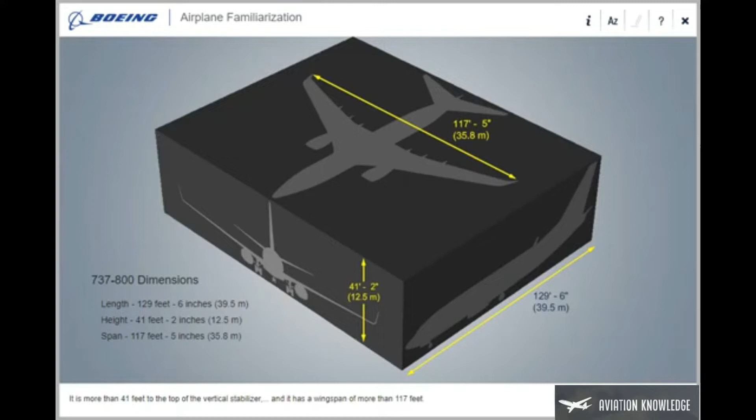The Boeing 737-800 airplane is approximately 130 feet from nose to tail. It is more than 41 feet to the top of the vertical stabilizer, and it has a wingspan of more than 117 feet. The minimum width to turn the airplane is approximately 79 feet, or 24 meters.

The weight limits for the 737 are different for each airline. There are limits for the maximum zero fuel weight, the maximum taxi weight, the maximum takeoff weight, and the maximum landing weight.

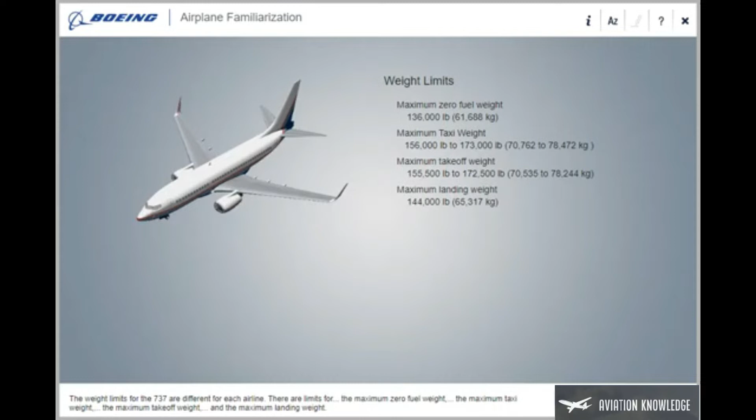The 737 has CFM56-7 gas turbine engines. The engines have a high bypass ratio and full authority digital electronic engine control, or EEC, for best operation. The engines can be set to supply between 24,200 and 27,300 pounds of thrust.

Each engine has a 90 kVA generator. The generators power different buses and are not used in parallel operation. The engine fan diameter is 61 inches. The engine nacelle has a flat bottom to give sufficient ground clearance.

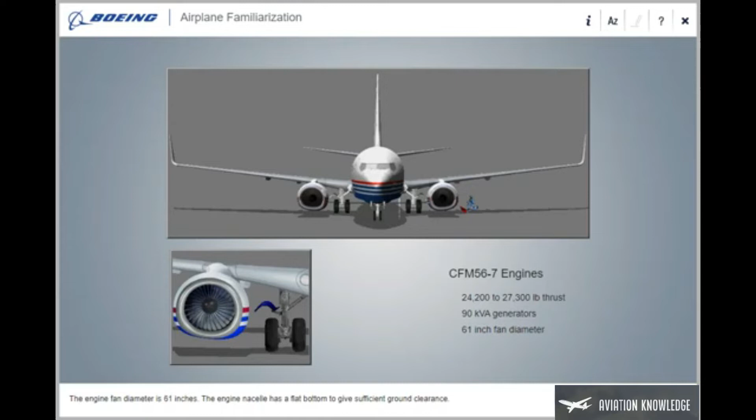The 737 can fly short to medium-range flights. The maximum altitude is 41,000 feet. The maximum operating speed is 0.82 Mach.

The 737 flight controls, normally operated by the hydraulic systems, control pitch, roll, and yaw.

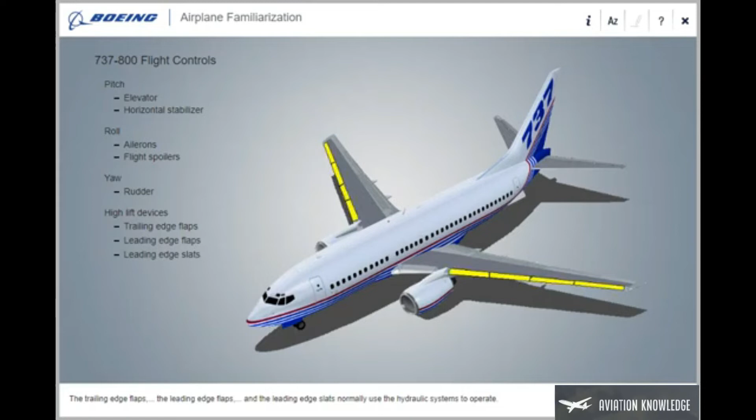The trailing edge flaps, leading edge flaps, and the leading edge slats normally use the hydraulic systems to operate.

Manual operation, called manual reversion, is available for pitch control and roll control.

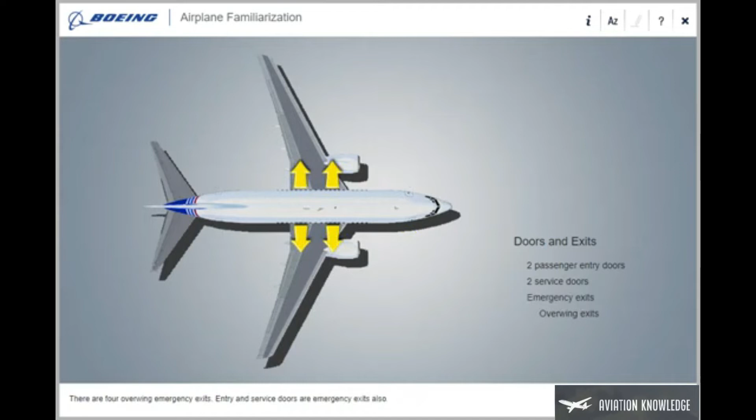There are two passenger entry doors on the left side of the fuselage and two service doors on the right side of the fuselage. There are 4 overwing emergency exits. Entry and service doors are emergency exits also. There are 2 cargo doors, one forward and one aft.

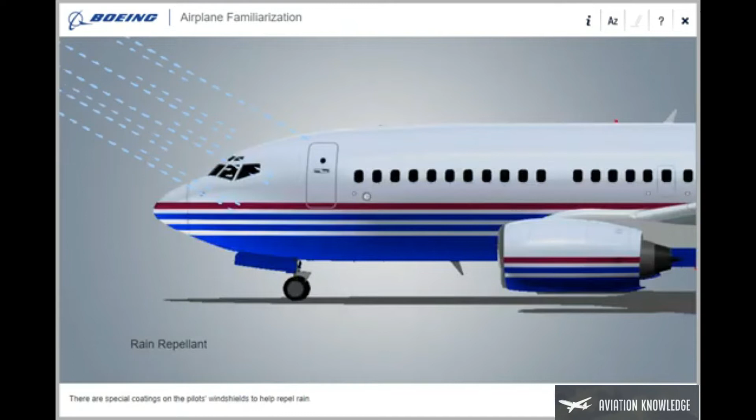There are special coatings on the pilot's windshields to help repel rain.

An APU in the tail supplies electrical power on the ground and in flight at all altitudes. The APU also supplies bleed air on the ground and up to 17,000 feet. Electrical power plus bleed air is available up to 10,000 feet.

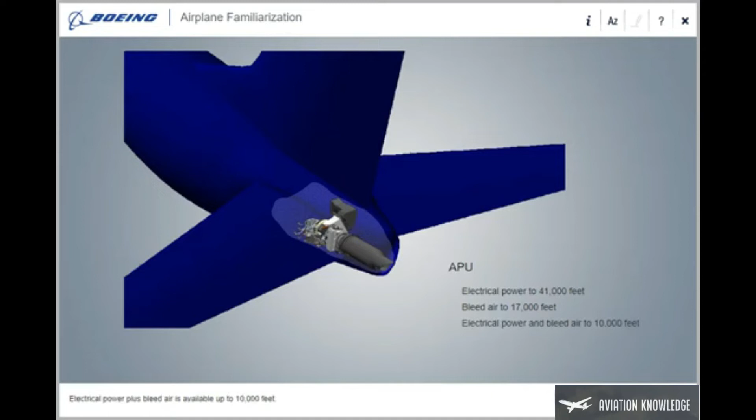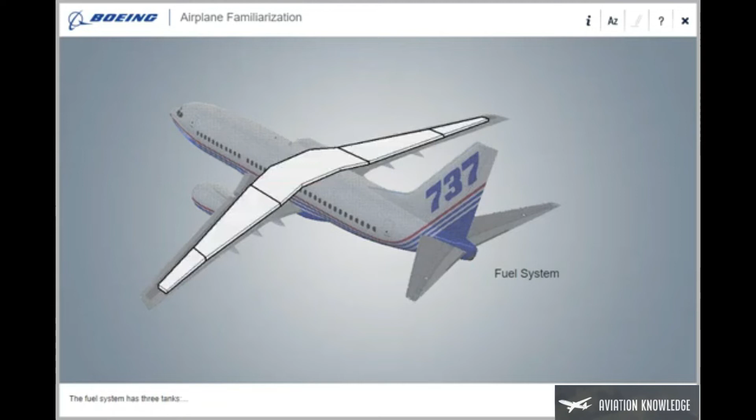The 737 has 3 landing gear with 2 wheels on each gear. There are anti-skid brakes on the main landing gear. The nose gear can be steered with the nose wheel steering wheel or with the rudder pedals.

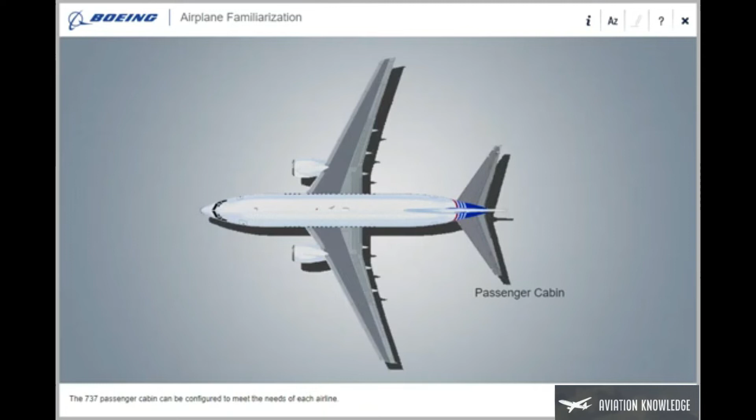The 737 passenger cabin can be configured to meet the needs of each airline. A maximum of 184 passengers can be accommodated in an all-tourist configuration.

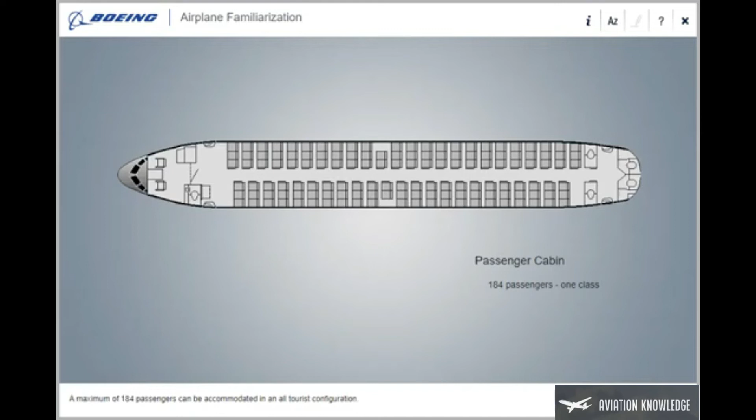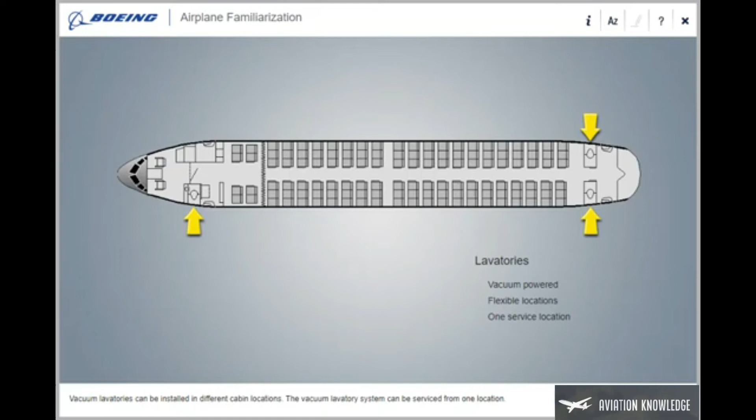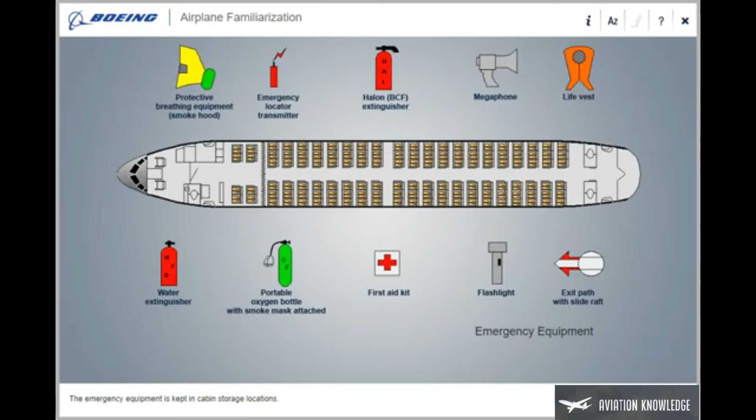Vacuum lavatories can be installed in different cabin locations. The vacuum lavatory system can be serviced from one location. Galleys can also be put in different cabin locations. The emergency equipment is kept in cabin storage locations. Each passenger door has an emergency slide.

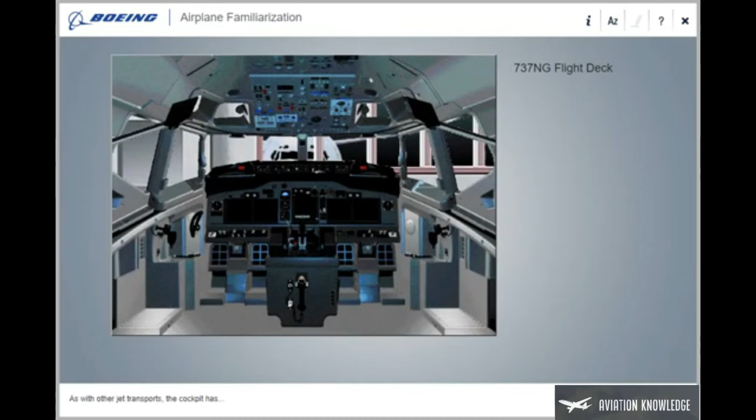As with other jet transports, the cockpit has the overhead panels, the glare shield, the instrument panels, the center instrument panel, the forward electronic panel, control stand, and the aft electronic panel.

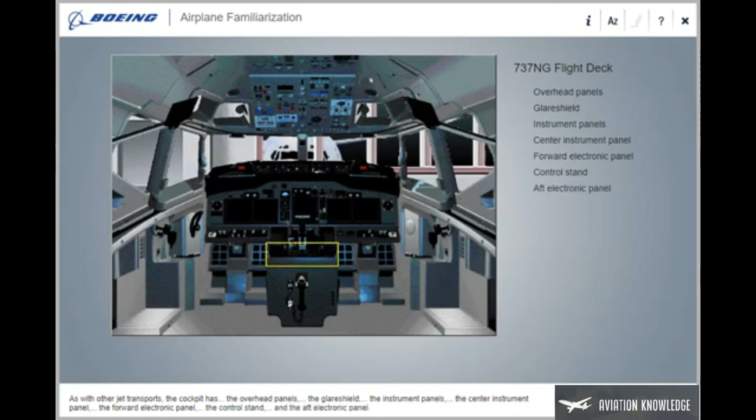There are 6 flat panel liquid crystal displays, or LCDs, to show flight and engine data. The Electronic Flight Instrument System, or EFIS, can show the primary flight instruments and navigation data in 2 optional formats.

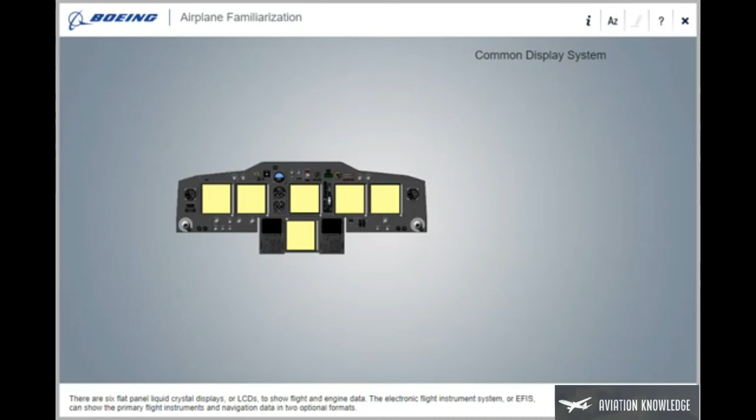The 737 NG EFIS map format shows flight and navigation information in almost the same way as the 737 classic airplanes.

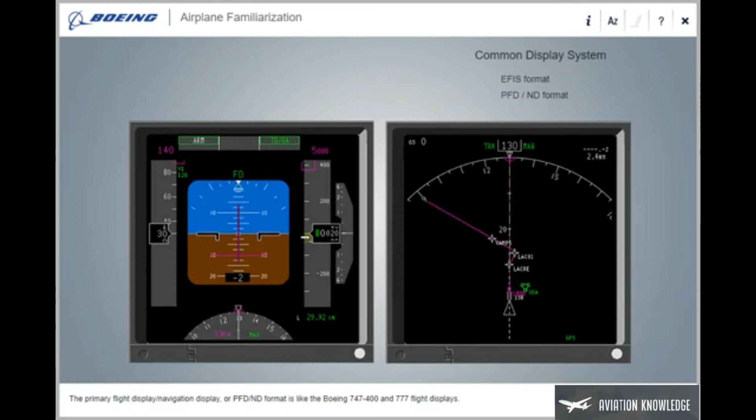The primary flight display navigation display, or PFD-ND format, is like the Boeing 747-400 and 777 flight displays. The upper display shows engine indications and systems information. An optional configuration divides engine information between the upper and lower displays.

A radio communication system includes very high-frequency radios. There can also be high-frequency radios. The radio communication system can also include a data link system to send and receive data link messages.

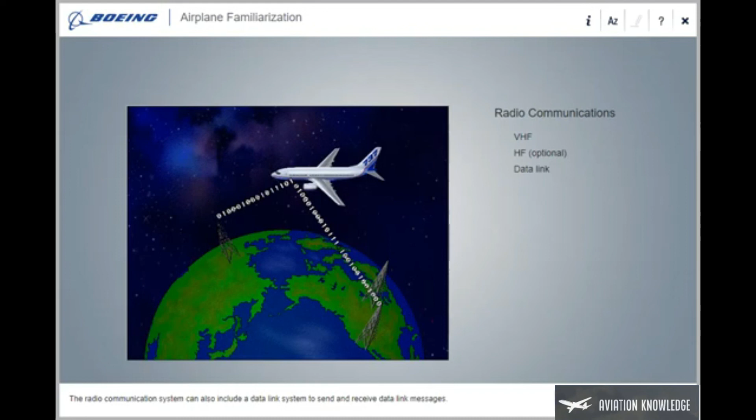The Flight Data Recorder System records data for the most recent 25 hours of operation.